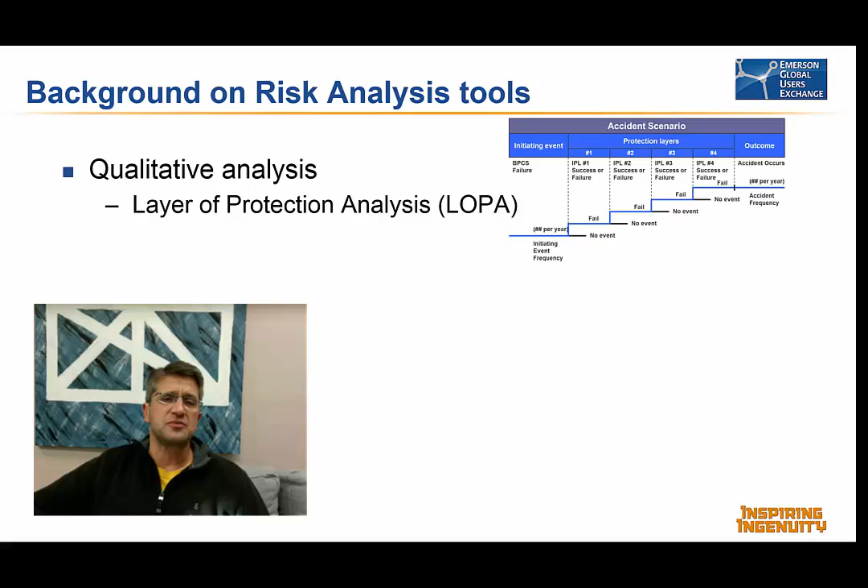And we'll start with a little bit of a background on risk analysis tools. So there are tools that are entirely qualitative and there are tools that are semi-quantitative. Like layer of protection analysis is a semi-quantitative approach. It looks at order of magnitude jumps in risk, and it really has a limited set of different logical types that are available.

And I'm sure many of you are familiar with probability and severity matrices, as these tools have been used for tens of years, for tasks ranging from reliability-centered maintenance to risk-based inspection to hazard and operability studies. They just give coarse general descriptions of the risk.

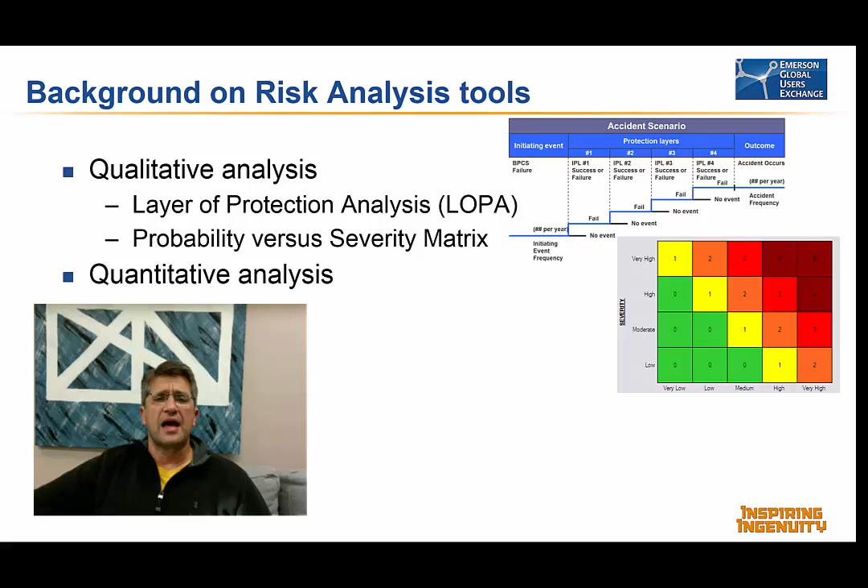Now, beyond qualitative analysis is quantitative analysis, where you try to actually calculate probabilities and frequencies and calculate the consequences of loss of containment events. And a tool to perform this type of assessment would be a fault tree analysis, or even a simplified fault tree analysis, which gives you a little bit more flexibility in the accuracy or the precision of the numbers that you're using and the different types of logical constructs that are available to you.

Now, when you perform an analysis, outcomes can vary from site to site. This is not only possible, it's to be expected, because different sites have different equipment configurations, different maintenance programs, different stressors, and different situations that occur on one site that might not occur in another, that can add new failure modes and also change the rates at which different failures are likely to occur.

Okay, and the quantitative analysis of risk is what we've chosen for this discussion, basically to set the problem up and create a starting point for you to perform more detailed analysis of your facility to determine if wireless may be appropriate for some situations in your plant.

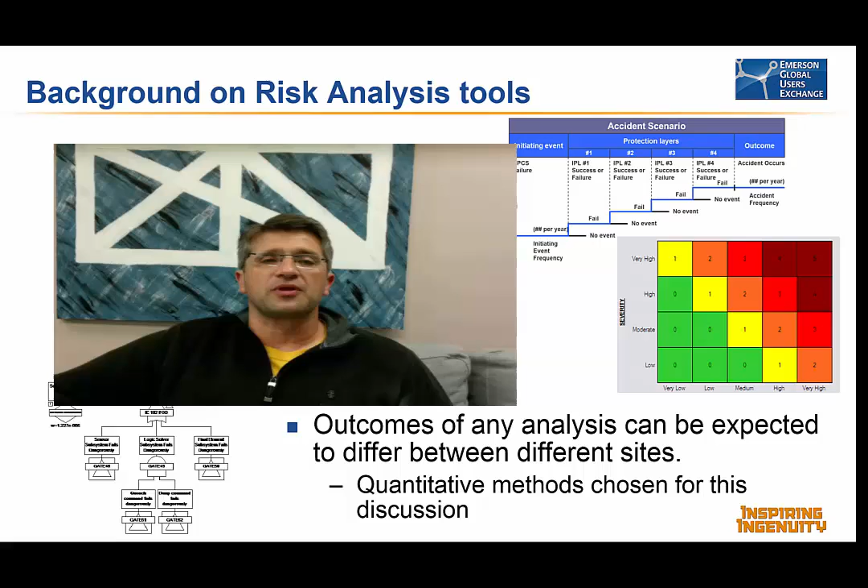Okay, I'm going to start by giving a general description of fault tree analysis and how fault tree analysis works. Fault tree analysis begins with basic events. They are the root causes of things that occur in unwanted accidents that we're trying to calculate the frequency or the probability of. So basic events are an event that's so basic that you don't want to break it down further and you simply want to attempt to quantify it.

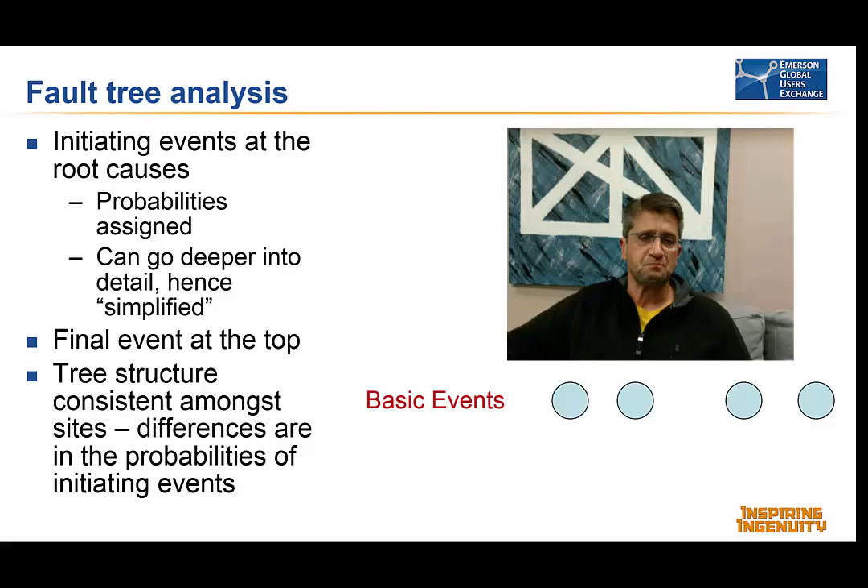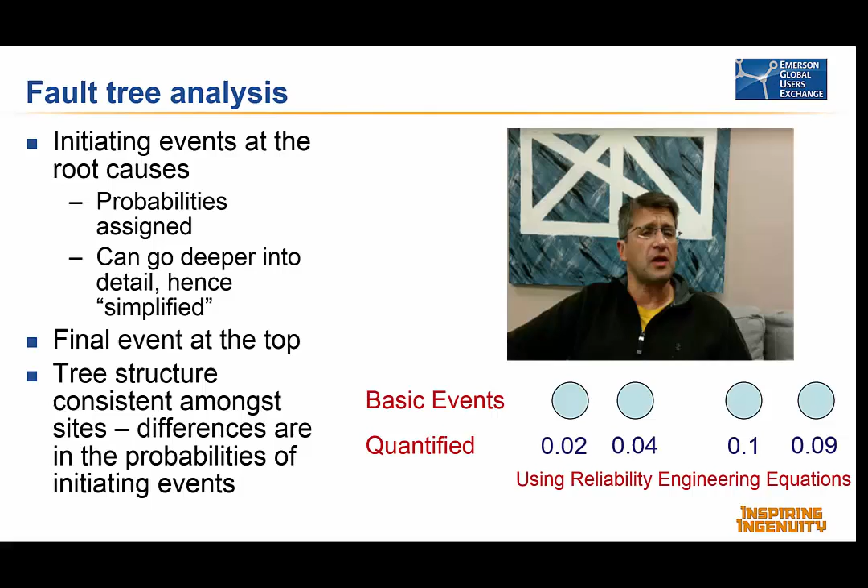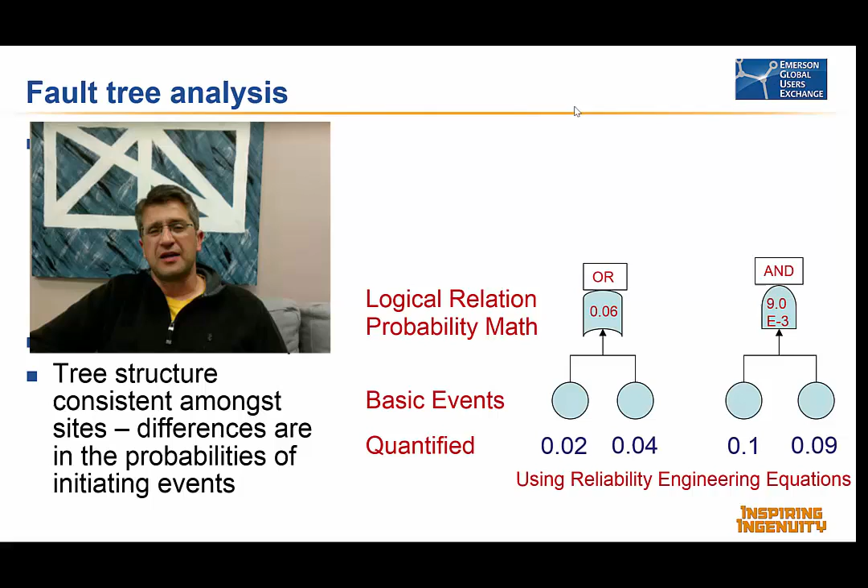And you'll quantify the basic events as either probabilities or frequencies, and you can perform that assignment based on statistical analysis or by using reliability engineering equations to calculate probabilities. From there, the basic events are related to each other with logical relations, either AND gates or OR gates. And mathematically speaking, the logical relation can be modeled using probability math. So if I could slightly oversimplify the problem, in an OR gate, what you're going to want to do is add the probabilities together.

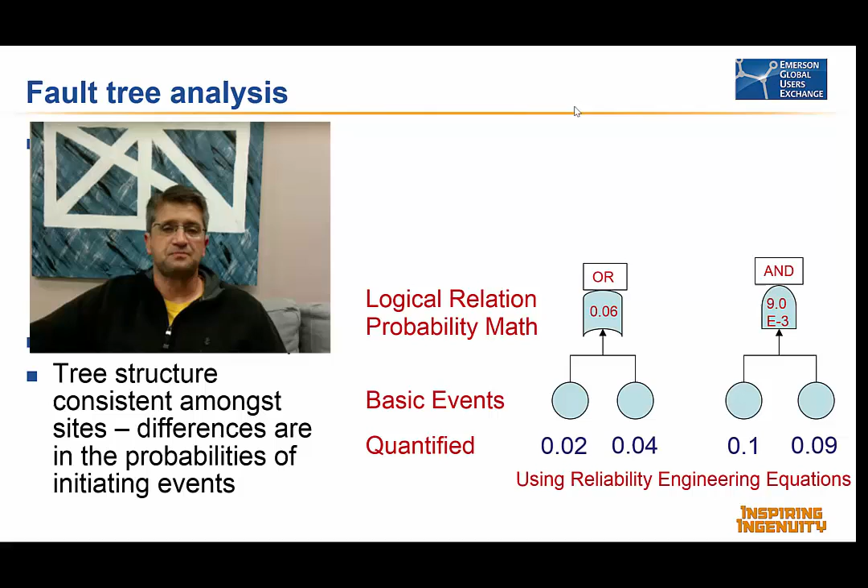And for an AND gate, you're going to want to multiply the probabilities together. And you continue to take that approach all the way up the tree until you find the top event, and that is the failure or the event of interest that you would like to quantify.

Now, before I go into the fault trees, let me talk a little bit more about safety nomenclature, because what we're going to be looking at in the fault trees that we're going to see in the next few slides are revealed or overt failures. They're failures that announce themselves and that you know about them almost immediately.

And for transmission, wired or wireless transmission, we're going to find out that almost all the failures that we're going to be concerned with are revealed or overt failures, because they're going to announce themselves in a loss of communication that is going to probably cause your plant to go to a safe or a shutdown state.

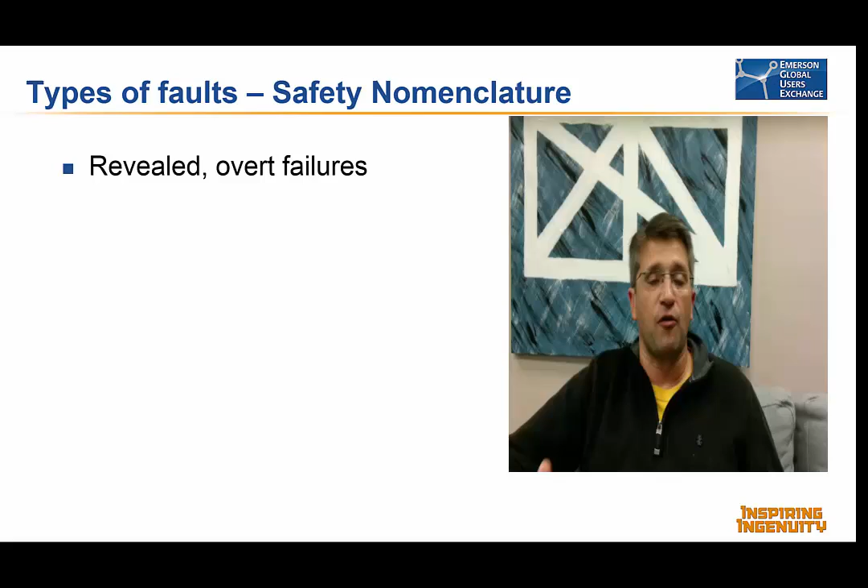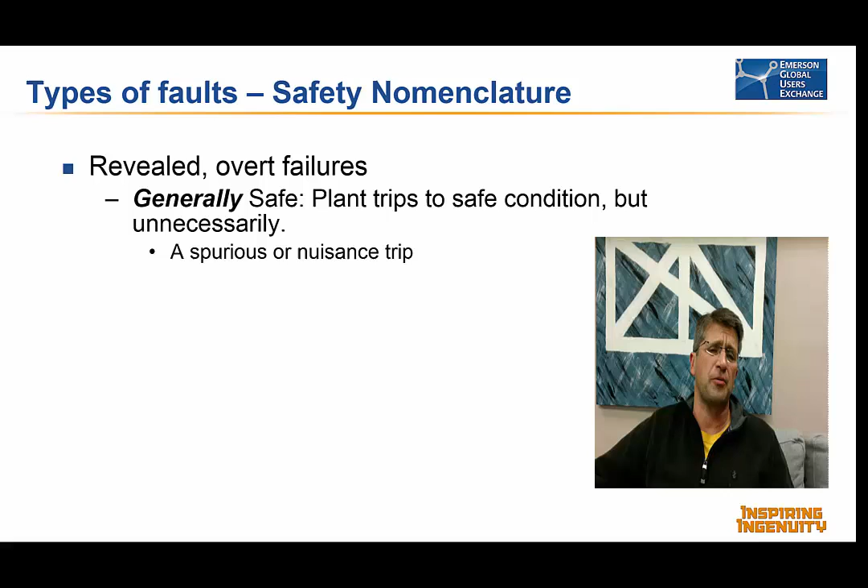As I mentioned, these types of failures are generally safe. They'll place a plant in a trip condition, but you put the plant in the trip condition unnecessarily. Sometimes these are also called spurious trips or nuisance trips. Sometimes these failures are dangerous because sometimes when you shut down a plant, you can create a new hazard that you didn't expect. And nevertheless, starting and stopping plants is a hazardous condition of its own that we would like to avoid if at all possible.

Now, the other type of failure are the unrevealed or covert failures. They don't announce themselves. They lie in waiting until a demand is placed on the system and it cannot respond. So for a safety instrumented system, if the contacts on a relay are welded shut, you don't know that those contacts are welded shut until you try to open the circuit and it doesn't open.

And in this case, it's generally dangerous, especially for safety instrumented systems, because the safety instrumented system cannot respond to the hazardous condition. And you need to make sure that those types of failures all allow you to achieve a tolerable level of risk. Now, as I mentioned previously, we're going to be primarily concerned with revealed or overt failures because failures in communication systems are generally overt.

So if you have a wired system, especially if you're doing a de-energized to trip safety system, what that means is anytime you drop a wire or open a circuit, that's going to de-energize the final element of your safety instrumented function, causing the plant to go to a safe state.

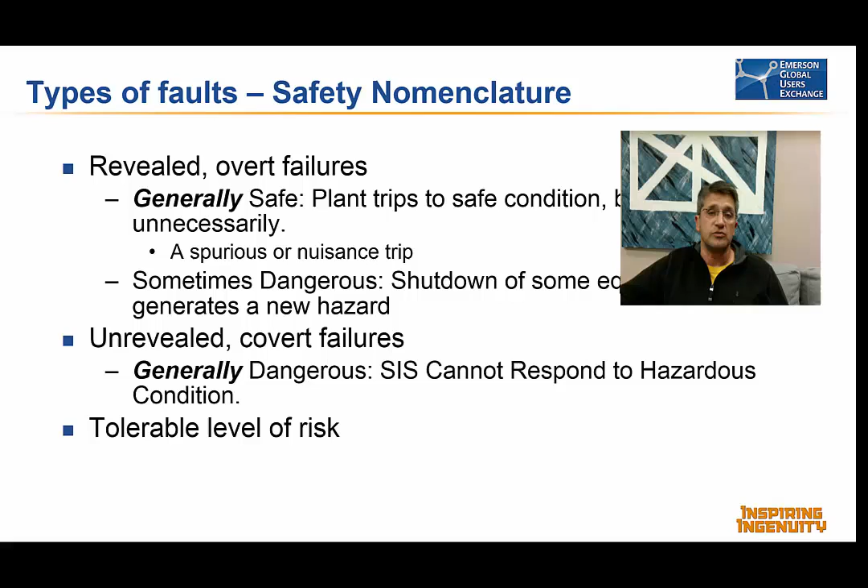And if the data received by a final element or any receiving device is not timely and is not valid, it is very easy to detect and then cause the system to respond in such a way that it moves to a safe state. So let's first take a look at fault tree analysis of a wired system.

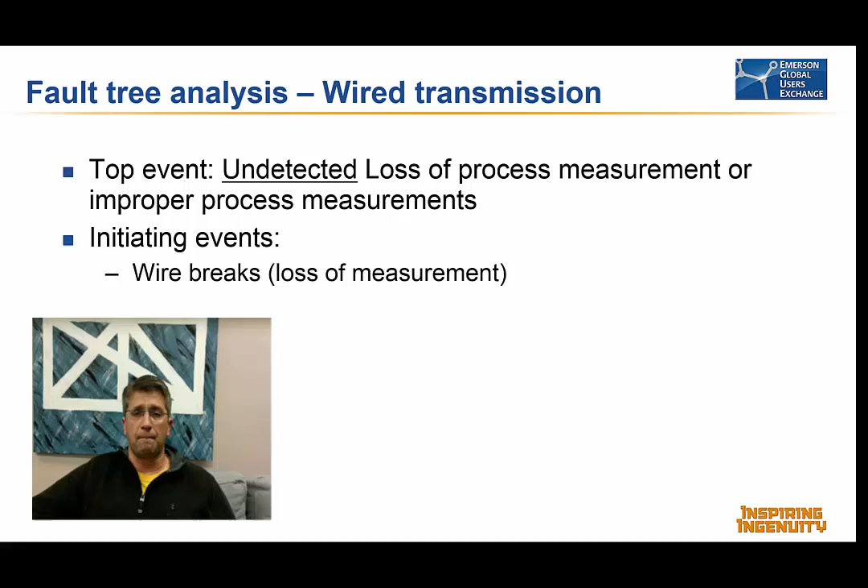Some of the typical initiating events for wired systems would be wire breaks. So either the wire breaks itself or is cut, or even in some cases the connection to the wire could be dropped. There are also partial circuit failures, which is kind of a wrong measurement as opposed to a loss of measurement. This is going to be the result of loose or corroded screw terminals or ground faults that are partially dragging down a circuit.

So for an analog circuit, you might have a 4 to 20 signal that, because of some sort of impedance on the circuit, the transmitter might be trying to send 20 milliamps, but as a result of excessive impedance, you might only get 16 or 18 milliamps at the receiver. That's what we're going to consider a partial circuit failure.

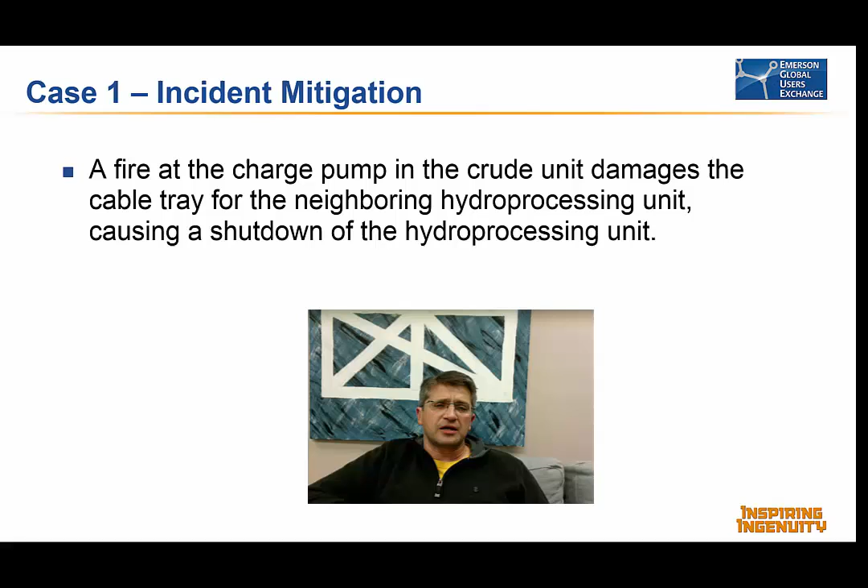Okay, so for the first one, there was a refiner that had a fire at a charge pump in a crude unit, and that fire caused damages to the cable tray in a neighboring hydroprocessing unit, causing that unit to shut down. Well, they were faced with a variety of options, none of which they liked. The refinery was in a remote location. They didn't have access to sufficient cabling to be able to perform that repair for months.

So in this case, the operating company considered using wireless transmission for some of the less critical indication-only measurements to allow them to reduce downtime. So what wire they had, they used to wire up safety critical control loops, and then they brought the rest of the communications in using wireless in order to save them days and weeks of downtime.

Okay, and in this case, the process throughput was about 30,000 barrels a day at $5 a barrel. Every day that they were able to get that process unit up and running sooner saved them $150,000.

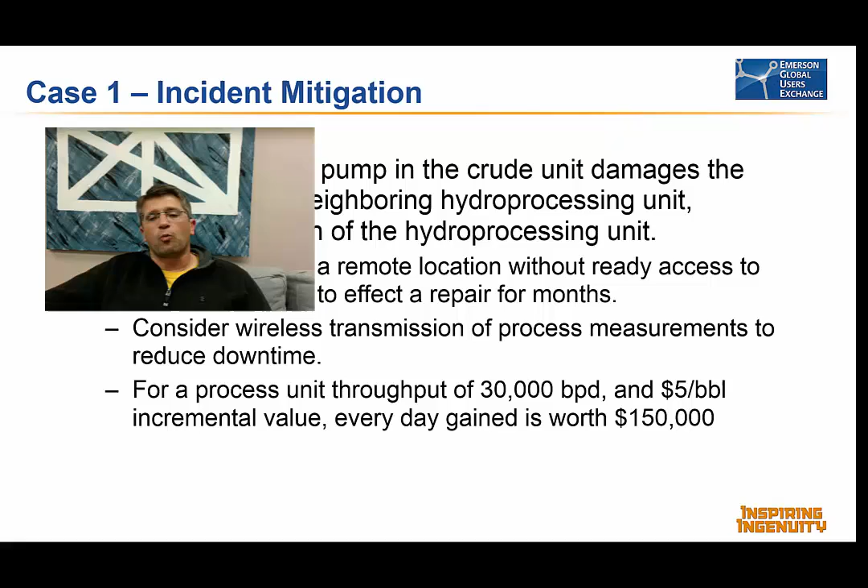Okay, another case is pushing the envelope on tank overfill protection. Now currently, API has a recommended practice 2350 for automated storage tank overfill protection, and that recommended practice does not recommend using wireless for an initiating action that's going to prevent an overfill. So if you're measuring tank level and using that level to actually close a valve, the RP doesn't recommend that you use wireless. Of course, it doesn't recommend that you don't use wireless, but it doesn't recommend that you do use wireless.

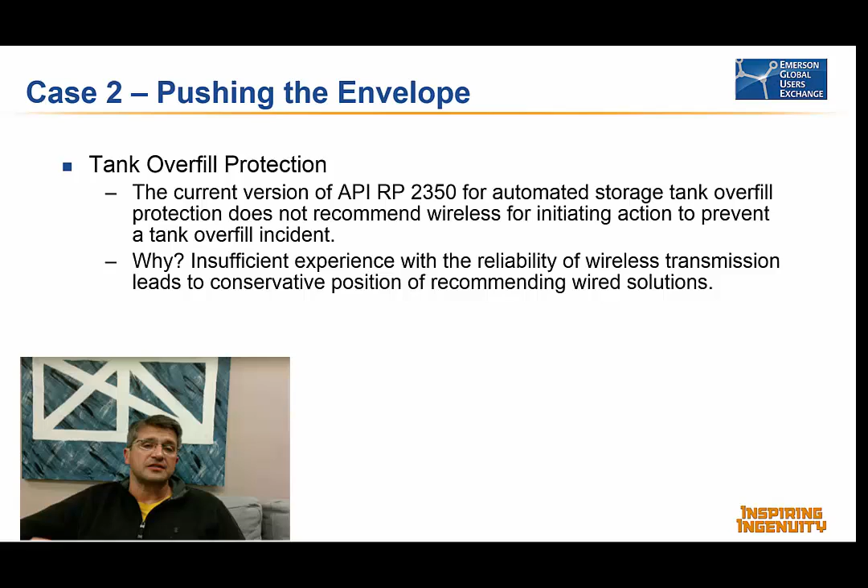But in either case, you still have a lot of remote storage tanks where your overfills or the levels only trigger alarms indicating that some sort of action needs to be taken. Now, why did they do this? Well, basically because there's insufficient experience in the reliability of wireless devices. As we get more experience with wireless devices, this conservative position might change. Again, very similar approach taken for the first safety system standards, not using wired buses.

But something to think about, especially in tank farm solutions for oil and gas facilities and refining facilities, these devices are in remote locations, and wiring costs are going to be many multiples of the cost of the device itself. So in alarm-only situations and situations where I don't have funding to actually put in my SIS, perhaps you might want to consider the lower installed cost solution of a wireless signal.

And another benefit or consideration in using wireless signals for tank overfill protection is that you usually have quite a long process safety time. Your process safety time between when the alarm is supposed to come in and when the tank overfills could be 30 minutes to an hour to over an hour. So if you lose communication for 1, 2, 3, 4, 5 minutes, it's still within the process safety time and it might not require triggering a shutdown, again, improving the overall availability of your process plant.

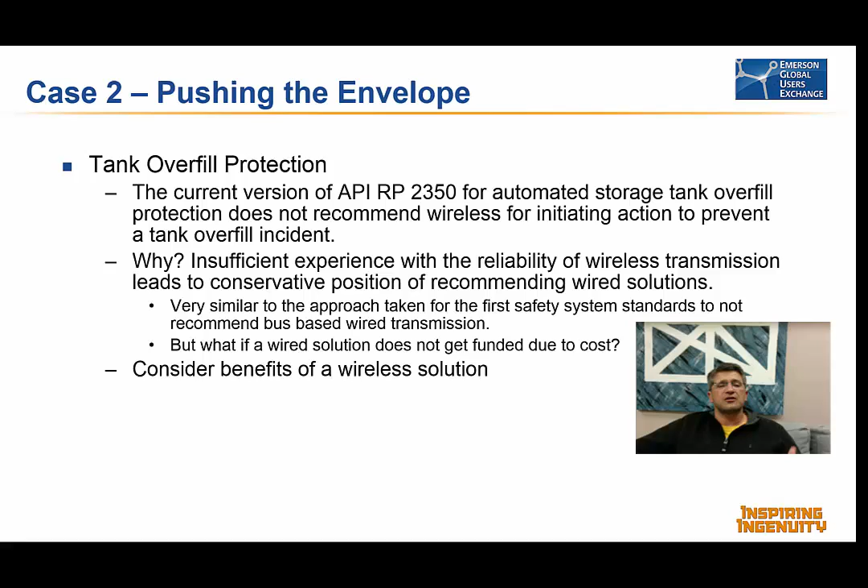You really need to consider the costs and the benefits of a wireless solution. It might be the right solution for your facility. Okay, and when you're doing that cost-benefit analysis, you need to consider, well, what is the consequence of an overfill? What is the probability that a wireless system will fail to prevent that overfill? And use that in your thought process when you're determining which solution is most appropriate.

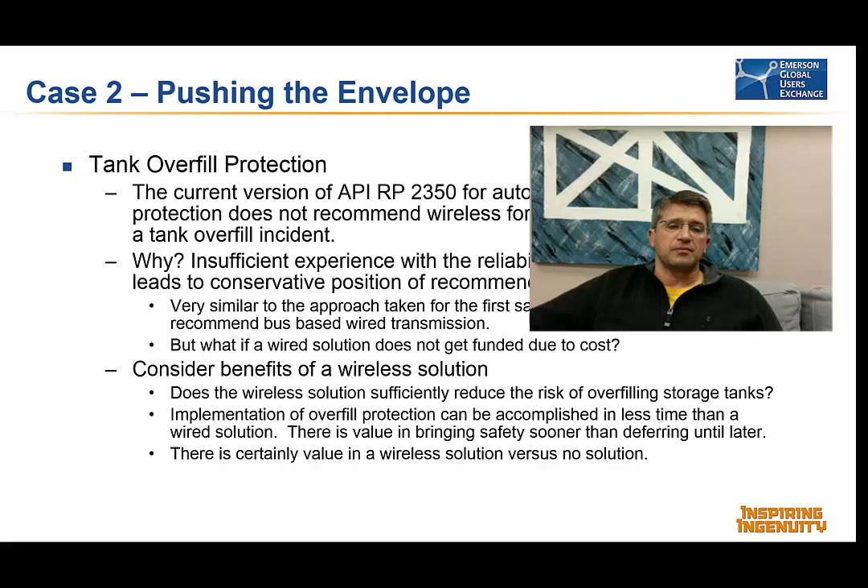Critical measurements. A refinery in Asia in the aftermath of a flood was trying to get itself back on stream. And what they noticed is that all of the devices that were wired were flooded out and shorted and needed to be either repaired or replaced, whereas all of the wireless communications was still in operation. They were able to survive the flood event, whereas the wired systems had a lower degree of survivability.

This led that refiner to standardize on using wireless transmission for critical measurements because it could survive some of the events that the wired systems could not. So it provided a little bit of diversity.

On that same note, looking at survivability, think about fire and gas systems, especially a fire and gas system that is designed to energize to trip. So you're going to want to open a deluge valve or turn on a fire water pump. These systems are usually designed so that you'll energize an output to cause that action to happen.

Well, some process plant equipment needs to be designed to survive foreseeable accidents. And an excellent example of that are fire and gas systems where you're activating fire suppression equipment out in the field. And as I noted, these systems often are energized to trip. So even if I have excellent redundant wired communications, a single explosion can sever both of those wires depending on how the wires are run.

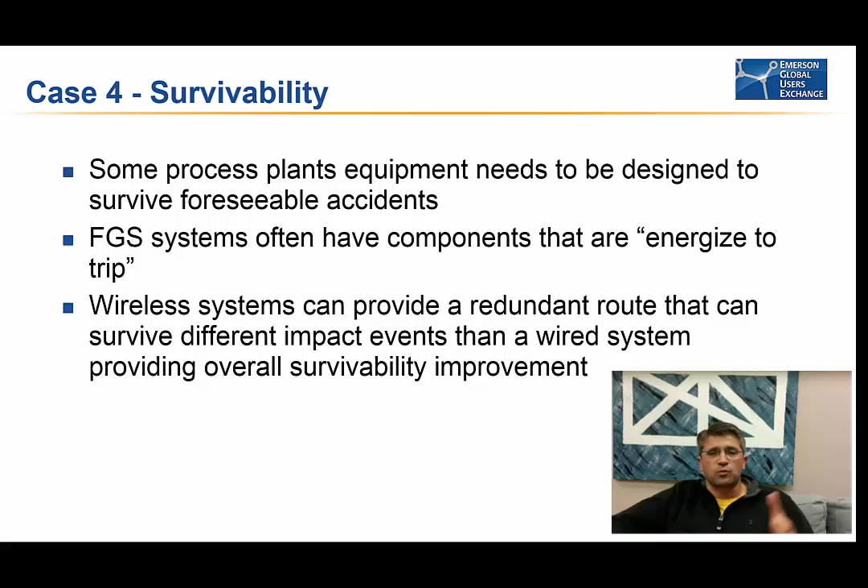Even if they're wired in diverse routes, a significant fire or explosion can cause both of those redundant routes to be compromised at the same time. In these cases, wireless systems are going to provide you a redundant route that has better survivability and is able to survive different impacts than wired systems. So if you, instead of going with two wired signals, had one wired and one wireless, you're going to provide an improvement on the overall survivability of your system.

So, business results achieved in these thought-provoking cases. Number one, the incident mitigation. It provided you quicker recovery of operations after a fire that damaged cables. In case two, for storage tank overfill protection, wireless may reduce your risk because it might be the only feasible, affordable solution in a number of cases.

Case three, for critical measurements, it provided a paradigm shift to the operations company that said, if I have diversity in my communication types, I can improve the survivability of my system to major accidents that I might not be able to predict. Overall, all of these systems allow you to resume operations quicker after an incident occurs and also improve safety sooner.

So in summary, we've demonstrated that risk analysis tools can be applied to a wide variety of events besides just studying safety instrumented systems. They can look at the overall reliability and availability of different plants for different failure modes. Wireless transmission is going to offer you a savings in capital costs because you don't have to worry about the wire itself or the labor in performing the wiring. And it also shortens the time to implement, which again is going to be another time savings.